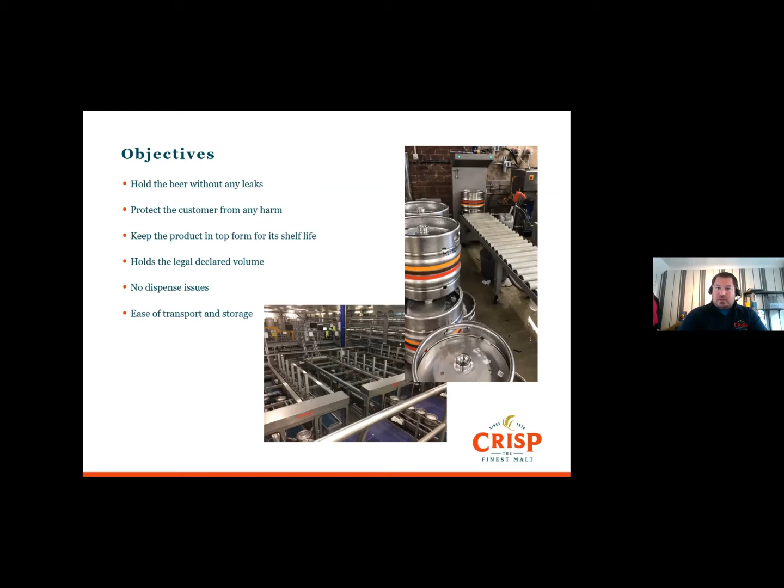Okay, so the first thing we need to think about when we come to packaging beer is the condition the beer's in, and we need to make sure that that's right for package, because it's going to have effects. So clarity-wise, the beer can be hazy or unhazy. It's up to how you want to present the beer to the customer, but if it's got yeast in it, you do want the yeast cells to be below 1 million cells per mil. Too many yeast cells is really not nice for the customer, and you might encourage some secondary fermentation in there as well, and that might become a bit of an issue.

We need to make sure the temperature is well regulated. Anything above 4 degrees C, you're not going to be able to get the CO2 in solution, and it's also going to fob quite a bit when you're filling, so you're going to struggle to get the right quantity of beer into pack.

If we are diluting any beer, which happens in some of the packaging plants, contract packers, or in the bigger brewers, you really want it to be done before pack, and you want it to go on a go/no-go. As you're diluting the beer, you are changing the whole structure of the beer, so it can have an effect on the PG and the palate, and the pH as well. So it needs to be well checked. And if you're using any water for dilution, you do need to make sure there's no chlorine in it, because you can get some chlorophenolic flavors coming through.

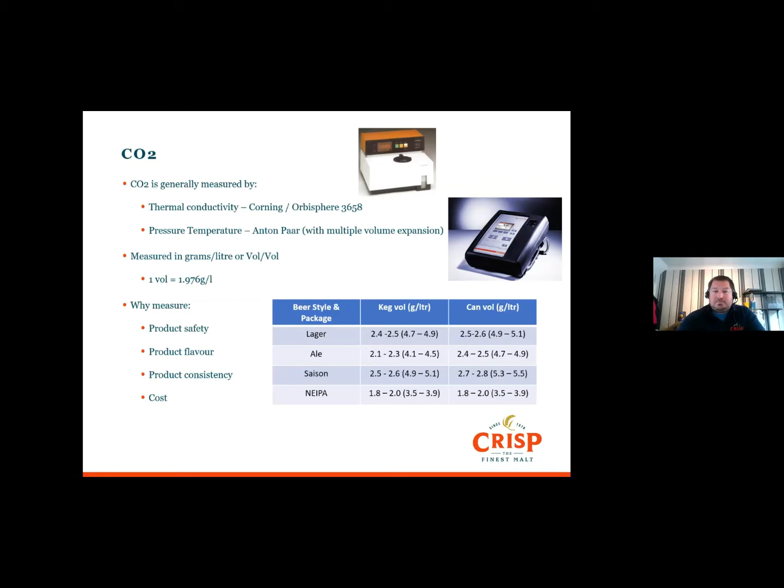DO2 measurement has come on a long way in the last few years. So the older fashioned way was using an electromechanical sensor where you've got a probe, and again the beer will flow over it and it will measure the oxygen within the liquid as it flows through it. And you've also got the optical sensors now as well, where it'll basically fire an LED light and depending on the oxygen levels within the beer, some of the light will be absorbed and will give you a reading of how much O2 is in the beer.

With them all, it's really important to keep them clean, because if you've got any biogrowth in there, it will use oxygen, it will skew the reading. The optical ones are a lot easier to keep clean and really keep them in use. The electromechanical ones need quite a bit of tender loving care to make sure that the membranes don't fail in any way and don't get bubbles below them. But the optical ones these days are very, very good.

When we are using them, we need to make sure that there is good flow control. So do take a look at the recommendations from the supplier to make sure that you're within the right control going through. If you just turn off the flow and don't let it go, you'll get an incorrect reading, generally low.

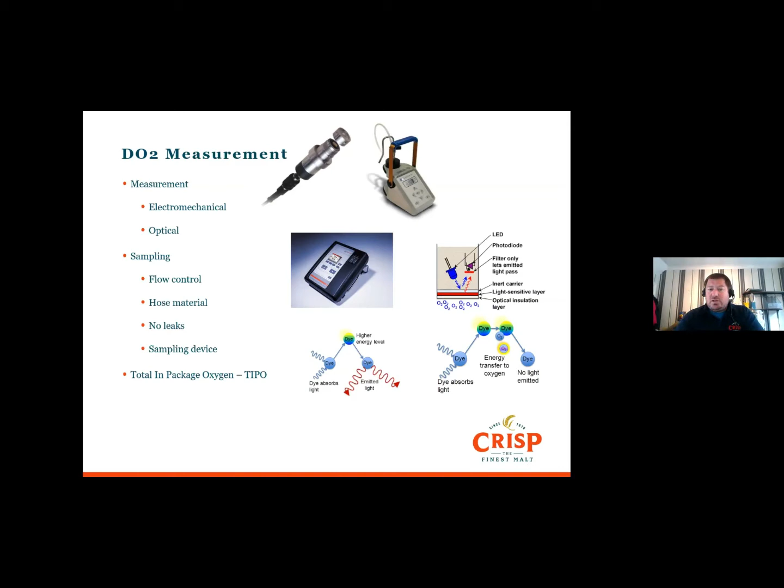So we really want to control DO2. Everybody knows what effect it has on beer. So there's quite a few ways we can do this. We can use deaerated water to flush out all the lines and the tanks, and then purge it with CO2. So if you fill it with deaerated liquor, it's fine to just then follow beer through. It'll take most of the oxygen out.

If you've not got deaerated liquor, then if you fill your lines with water and then blow it out with CO2 or nitrogen, that'll really bring the oxygen levels down. And the same with tanks as well. If you really want to make sure there's no oxygen in the tank, you fill them with water, put top pressure on, and then blow the water out, and they'll be fully deoxed.

Making sure the system's fully balanced, again, to stop pump cavitation. So you can do that by using a VSD, which is a variable speed drive. So it's really good when you fill a tank to start slow, start really, really slow until you build up enough volume within the tank where the liquid's going into the liquid, and then you can speed up and then slow it down again at the end once your feed tank's becoming empty, which is really easy to do with VSD.

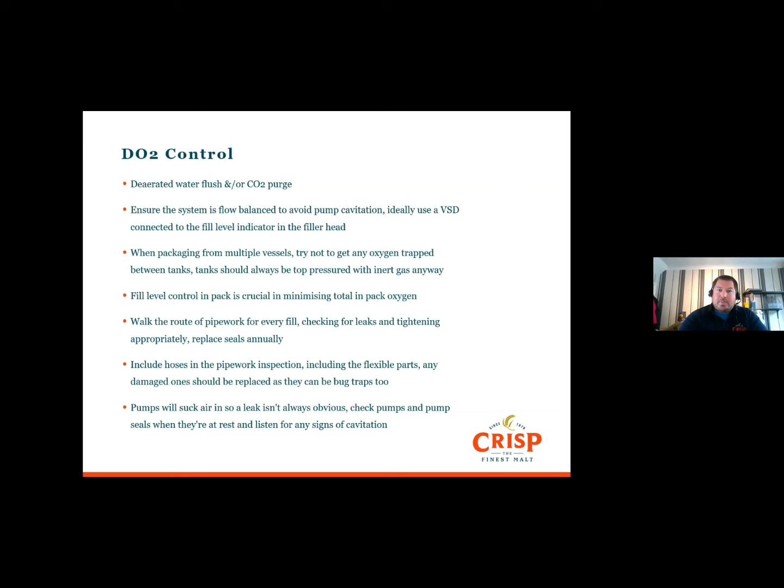So coming on to total package oxygen. So as said before, we've got the beer, and then we've got the headspace. So the total package oxygen is the combination of the oxygen within the beer and then the headspace. It's not basically shaking it up and then running it through the DO meter and then getting your results. That is the oxygen within the beer, and you need that, but we need to worry about a few bits and bobs as well. So we need to make sure that we've got equilibrium. So we're doing that by shaking the package. That makes sure that any of the oxygen within the headspace is evenly distributed between the beer and then the headspace when it settles out.

We need to know the dissolved oxygen then of that liquid, which we get when we measure it. We need to know the temperature as well, because the temperature has different effects on how much oxygen's within the liquid and the headspace.

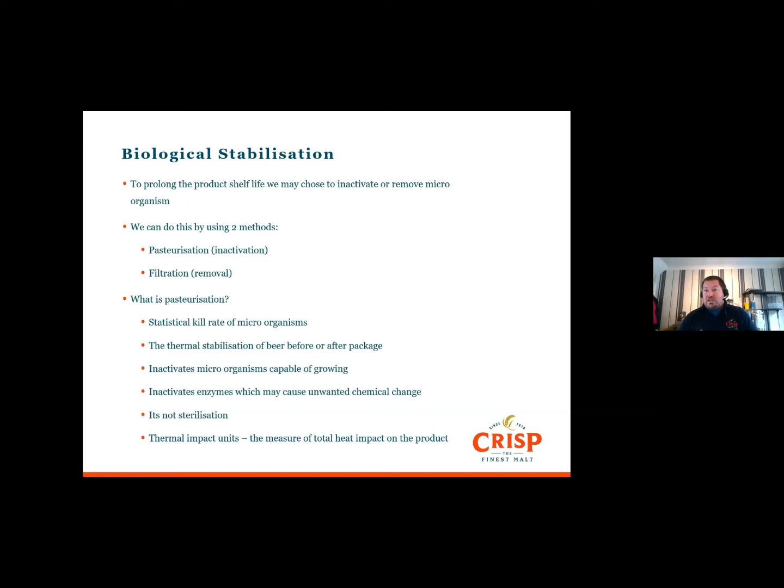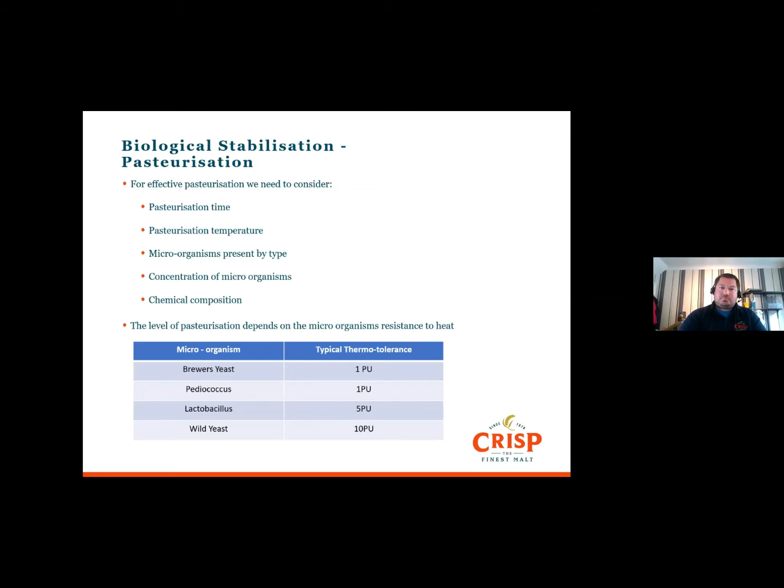So what is a pasteurization unit? It's basically one PU is beer that's been held for 1 minute at 60 degrees C, and it's Louis Pasteur who did the research work on this. So we've got a calculation that we can use for this, and it's basically PU equals the holding time in minutes times 1.393 to the power of the holding temperature minus 60. So we put all that together, we'll get the PU of what we need.

And typical PUs that you'll come across in the UK and Europe are between 20 and 30. And then USA, Japan is generally a bit lower at 5 to 15. And that's historically between the beers that were brewed in the different places. So in the US, Japan, you'll get quite light lagers. And then in the UK and Europe, you've got a bit of a different array of beers, giving it different UK bitters or different kinds of beers from Germany, some wheat beers.

So, have we missed one there? Nope.

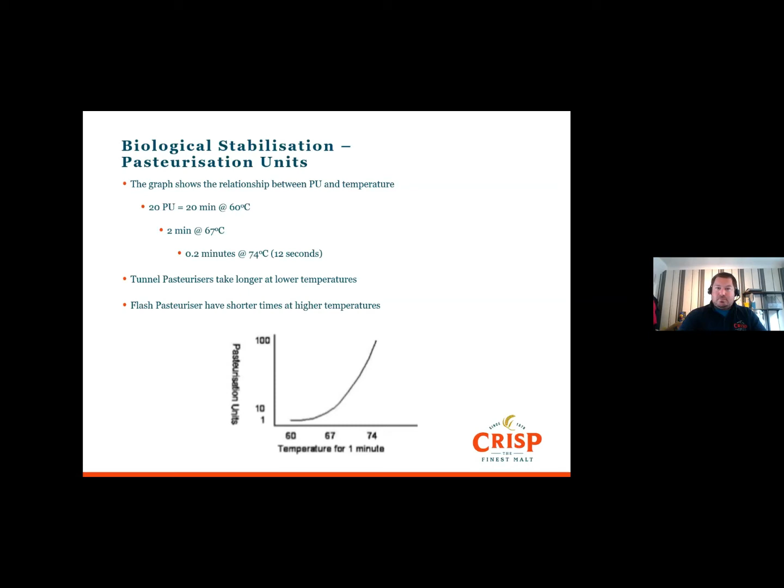With tunnel pasteurizers, as I said, the beer is pasteurized within the container, and they are actually quite simple bits of kit for as complex as they are. All that they are is a series of heated water tanks or cool water tanks that spray water over the beer as it passes through.

As the product moves through, so it enters the pasteurizer, it's either going to get picked up on a walking beam or just on a conveyor, and it basically gets water sprayed on it. But we can't just go straight away to pasteurizing temperature because we don't want to put too much shock onto the products, because we might damage the container. So we start off slowly, and then we gradually increase the temperature and then cool it down at the end.

A lot of pasteurizers these days as well have got PU control on them. So if they do sense that the PU within the package is going to go high for some reason, say that there's a stoppage at the labeler or the packer or anything, they'll basically put cold water on and they'll quench everything that's in there and stop the pasteurizing.

As well as that, we also use thermographs, and we'll put them through different parts of the pasteurizer as it's going through, just to double check. So Redpost will be a prime example, where it will basically measure the temperature as it's passing through the tunnel, and it'll give you a nice graph of exactly what's happening.

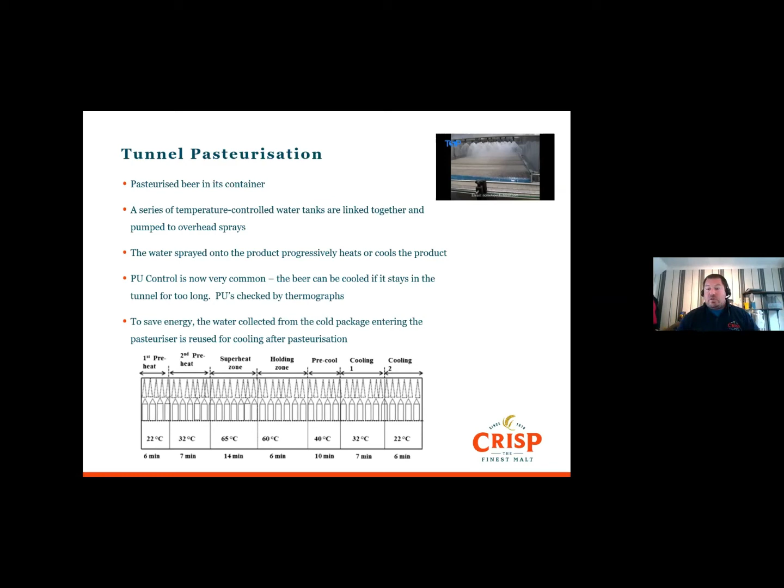So flash pasteurizers pasteurize just the beer; it doesn't do anything with the package, and it's all pre-filler, obviously. They're generally used in conjunction with a sterile buffer tank because you really need to make sure you've got good flow control on these, and they're a lot higher temperatures. So whereas the tunnel pasteurizer is going to be around 60 degrees, the flash pasteurizers are more up at 72 for that 12 seconds.

Now, because we're going higher in temperature, you'd think that we're going to have more of a thermal impact within the beer, but it's actually a lot less because it's a really short time where it's heated. So with a tunnel pasteurizer, it's going to be over 20 degrees for around about an hour, whereas with the flash pasteurizers, within a minute, it's up and back down again. So really, really good for the beer.

You do need to look after them though and make sure that they're managed right with a strict cleaning and sterilization regime, and they run at particularly high pressure because as we warm the beer up with the CO2 in it, the CO2 wants to break out of solution. So they typically run at around 8 or 9 bar. If that CO2 comes out of solution, then we're going to get little pockets of bubbles in there, and we're not going to get good heat transfer, and we're not going to pasteurize properly.

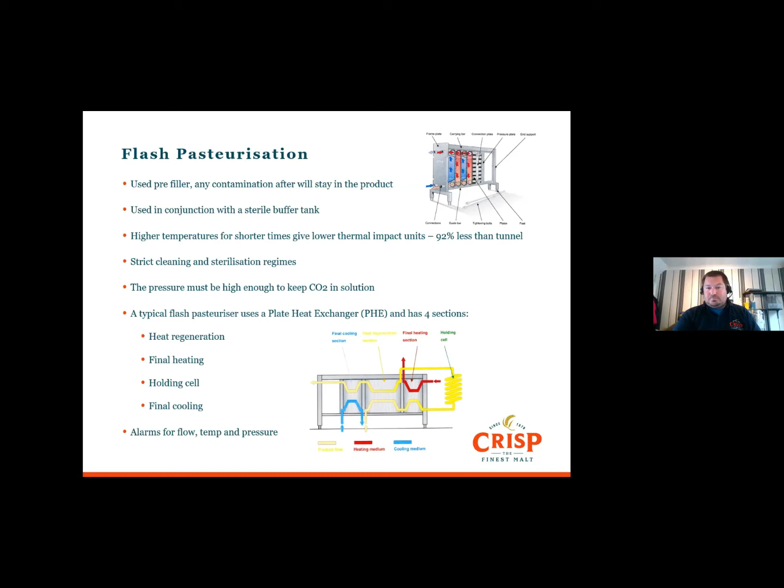The other way that we've got is by sterile filtration, which instead of leaving organisms within the beer and killing them by heat, strips them out. So we're basically filtering them out. So with these, you don't get any damage from any heat treatments. Again, it's before the package.

The difference between it being before and after packaging: if it's before, you've still got quite a lot that can go wrong when you're filling, up until you put the cap on, for any kind of contamination to take place. Whereas if you put it through a tunnel pasteurizer, it makes you sleep properly at night if you're a packaging manager, because you know that if anything's happened as it goes into the container, it's still pretty much going to be sorted.

So the sterile filters, the way that we look at how they work is basically the load reduction from what's going into the filter to what's coming out. And how much is being taken out is basically how we see how effective they are. So you can see it removes a very high percentage of organisms, but we can look at it from a slightly different way as well and go to the log reduction value. And we can see that if you're going for a filter, you want the log reduction value to be greater than 12.

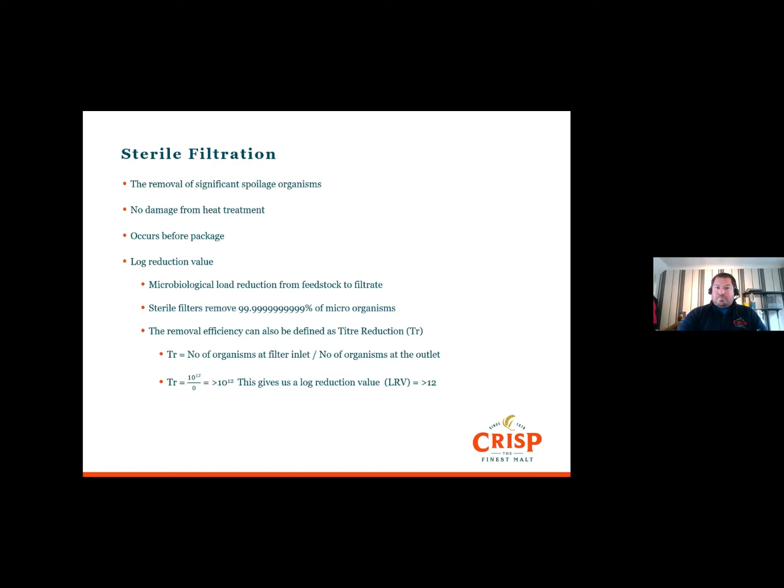There's also two different ways that filters are rated. So the difference is the description of what the filters are. Seems quite simple, really. So with the nominal, it's an arbitrary micron value assigned by the filter manufacturer. So there's a lot of ambiguity there, and it's not set in stone exactly what happens. With an absolute, it's the diameter of the largest hard spherical particle that will pass through under a specified test condition. So that's a lot more straight bat. Now, as a result of that,

thinking about what's at the start to what's at the end, if you've got an absolute filter next to a nominal filter in the same line with the same beer and same loading going through it, the nominal filter will probably only take out 85% of that initial loading instead of the 99.9999999%. So if you are going for sterile filtration, or mainly around beer filtration, do stick with the absolute ones. The nominals are fine for what I'd call your nuts and bolts filters, like any sand filters, or just to retain larger particles. But anything to do with filling and sterile filters, make sure you keep with the absolutes.

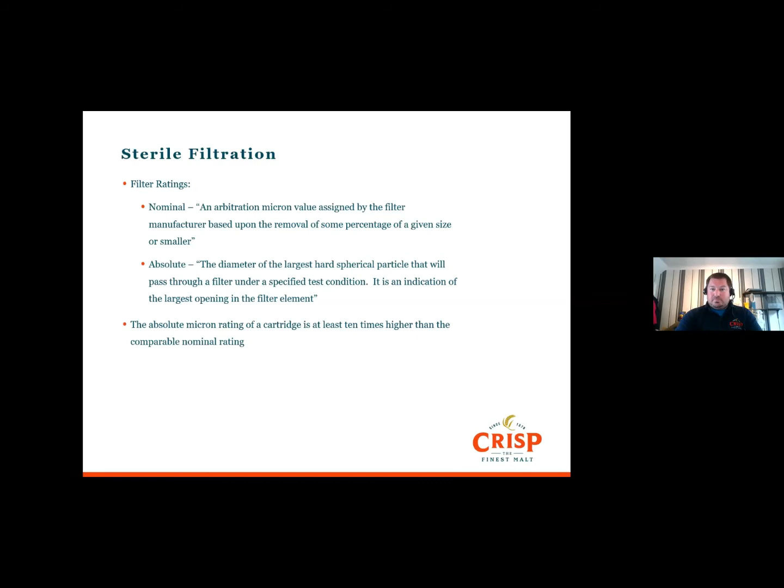So what some sterile filters might look like: the top one there is the Brewology unit. So the left-hand side is the sterile filter, the right-hand side is the pre-filter, and the screen just below it is how they were monitored. So it's quite a good little unit, this one. It had pressure sensors, pre-filters and after filters, and then it automatically kept an eye on the differential pressure going through the filters. On the sterile filter, as soon as you start getting up above 0.2 bar, that's when you really need to start thinking about stopping and cleaning, because if you continually do that, it'll just die very, very quickly.

So when we are using the filters, it's a really good idea to monitor and record that differential pressure and see how your filters are performing, because they are quite expensive. It'll help you come up with routines to make the best out of them. Also, when you're changing them, do record the batch numbers and record that you are changing them. It's just really good due diligence to show that you're in control of the process.

A bit more of a simple way of looking after them is down on the right-hand side. So the one up here was for a keg filler. The one down here is on a small pack line. So you can see we've got three. We've got a pre-filter, and then we've got the first 0.45 micron filter, and then we've got a second guard filter down here, just to make sure that if anything failed on this, the second one would make sure it's taken out.

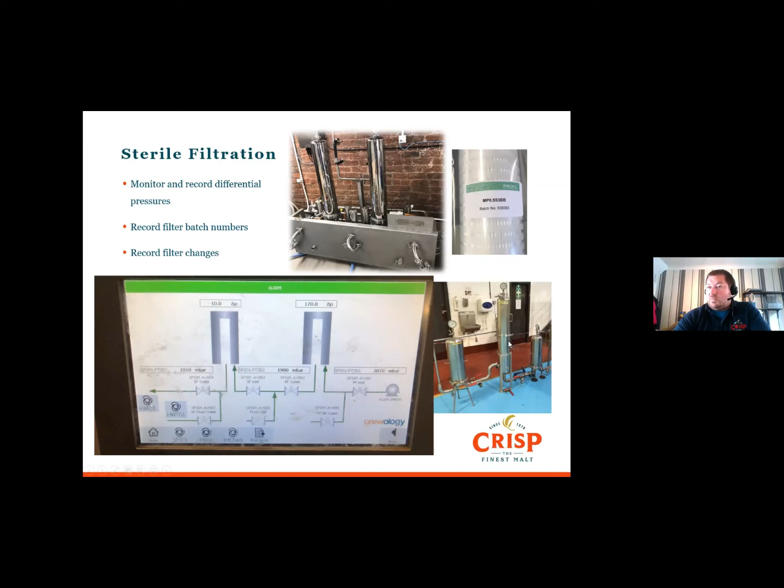So coming on to the keg, kegs come in generally three sizes. The most common now by far is 30 litre and 50 litre. 100 litre has kind of been phased out because of manual handling issues. And they're always available in stainless steel and aluminium. More and more these days it is stainless steel. You don't see many aluminium kegs knocking about anymore. They are pressure vessels, so they're generally tested up to 90 psi, and they've got a safe working pressure of 60.

They come with several different kinds of spears, so depending on how they're going to be dispensed and what dispensing head they've got, depends on what spear is within them. And what is unique around the stainless steel kegs is that we actually need to reuse it, so we need to make sure it's thoroughly clean.

So we've got a few different surfaces that we need to worry about when it comes to that. First of all is the outside of the keg. So we need to clean that up the best we can, get rid of all the old labels and just make it as attractive as it can be to the customer. Although they've probably been stored outside at the back of the pub for 4 weeks underneath a tree getting covered in all sorts, the landlord doesn't necessarily like getting a dirty keg back.

We've got the valve system on the spear. We obviously need to make sure that as that's broached, everything around it gets cleaned. We've got obviously the inside of the spear, but we've also got outside the spear. So you can start to see now where there might actually be some shadows around the keg cleaning, because we've suddenly got this long piece in the middle, and how we're going to make sure it's all thoroughly cleaned. And then we've obviously got the keg inner surface as well.

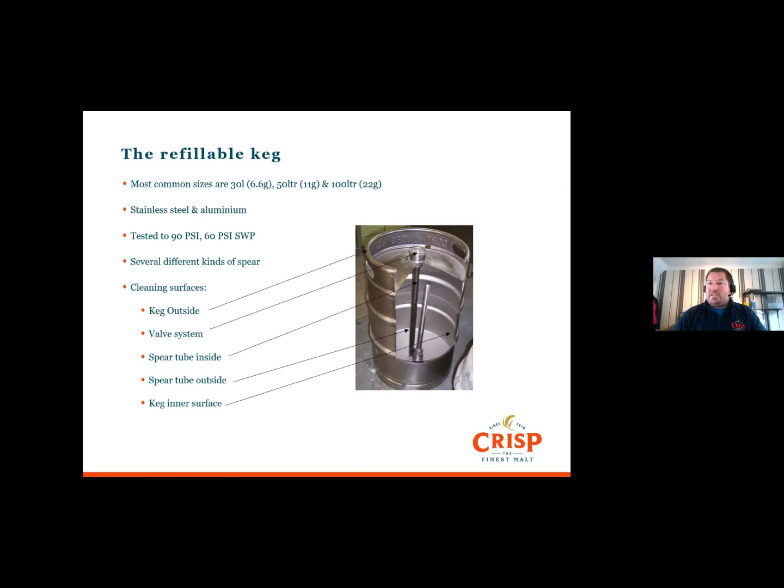So before I start using any kegs, the first thing that we're going to check is for damage. So just making sure that it's not dented in any way, the spear's not in a bad way. And we're also going to give it a smell to make sure that it's not got any hydrocarbons in there or paint that we're then going to fill beer into and completely destroy. And you might want to just check the spear's actually tightened up as well. Generally, we're cleaning them upside down, and we're going to supply the feed through the spear, and we're going to return it through the gas vents.

So the general stages through which we're going to clean the kegs: we start off with the ullage. So whatever beer's left within the keg, we need to get rid of that. So we can do that by just putting air on top of it and blowing it out. It's also a good thing to remember that that's duty paid beer. So if you can collect that and sample it and make sure it's right, then you can actually claim the duty back on that as well.

Then we're going to put a pre-rinse through it. We're basically just going to follow through with a pretty standard CIP now. We're going to put a pre-rinse through, but what we're going to do is pulse it. So we're not just going to put it on for a minute and forget about it. We're going to pulse it as it goes through. And then as we turn the supply off, the flow will actually then come down the spear and make sure that the whole of the keg's cleaned.

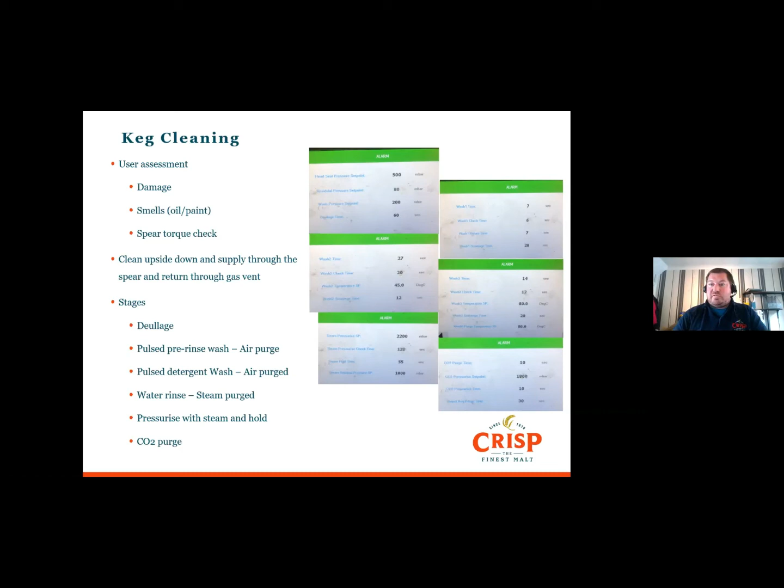The other kegs that we've got access to are one-trip kegs. So these get made up from quite a few different plastics these days, and come in some nice sizes as well now, 10, 20, and 30 litres. The main thing about these is the bags. The bags have got a dual layer aluminium lining. That aluminium lining just limits any oxygen pickup and CO2 loss.

And then we can see now, over a 6-month period, the maximum increase you're probably going to pick up on a 10 or a 20 litre keg is 0.3 ppm, or if you're 30, 0.2 ppm, and then you're going to lose 7% of your CO2 that's in there as well, which the manufacturers will say is comparable to what you'll get in a stainless steel keg.

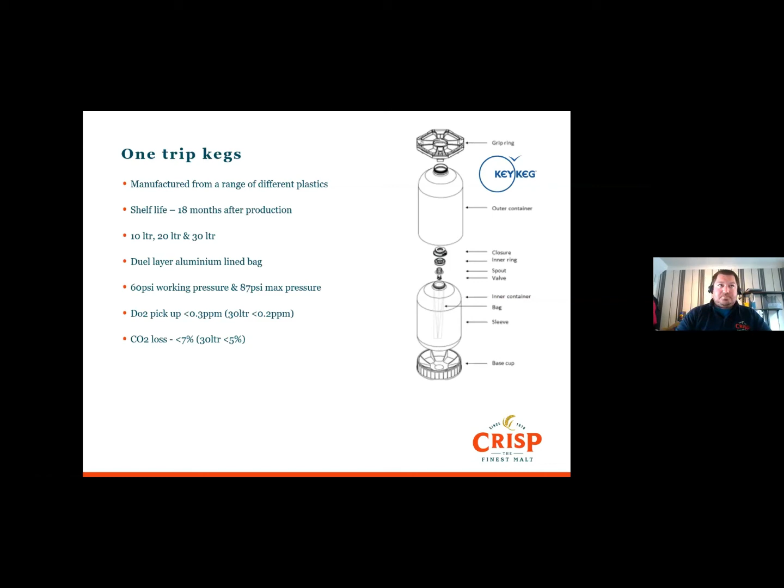So when it comes to filling the keg, we've got a couple of options. We've got the automatic option, or we've got a manual one. On the automatic one, basically we'll load the keg onto one of the fillers. It could be a rotary filler, it could be a linear filler, or it could be a line filler, or it could be a single head filler. They're filled upside down, like we say, and then they basically fill through the gas vents. So this just allows nice, slow, controlled fill.

Once we've got the gas to the beer to a certain level, we'll then speed up the flow by reducing the back pressure, and then come the end of it, we'll slow it down again, just to control the flow. And we know how much is going in there via a flow meter. Now doing this, we can actually fill around about 60 to 80 kegs per hour on a single head filler, like the one on the top right. The same head will also clean, but it'll only clean and fill at around about 18 kegs per hour. So it's the cleaning part of the keg process that takes a lot of time.

When you're filling it manually, KeyKegs are generally done upside down, and there's a special kit that you can get from KeyKeg. And then the stainless ones are filled on a slight angle. So if you've got a beer fob like what's on these ones, the flow will automatically stop once this beer fob detects that the beer's full. So the beer will basically lift up a ball that'll cover a hole and it won't fill anymore.

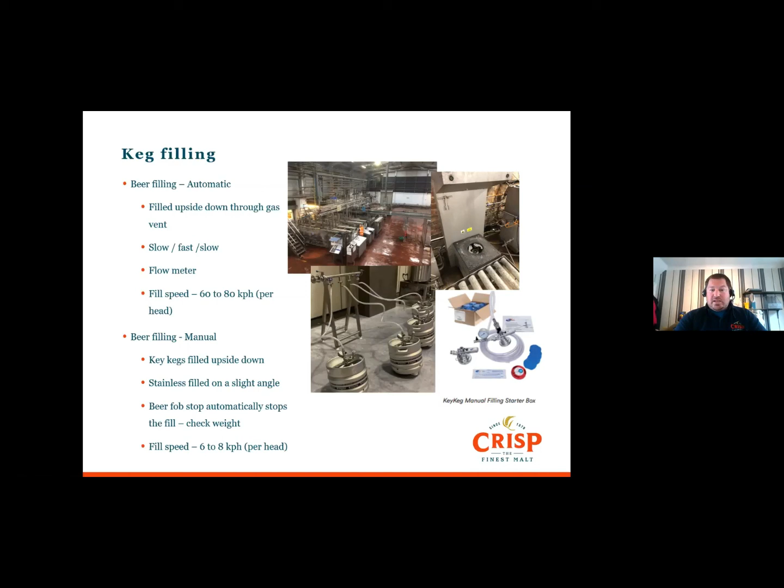So the reason why they're on a little bit of an angle is then when you put them on the floor, there's still headspace within there. If you just filled it without it being on an angle, it'd brim, you'd get hydraulic pressure and you get quite a lot of issues. And yeah, you're probably going to be able to fill between 6 and 8 kegs per hour per head on that.

So can filling: cans are quite flimsy and prone to damage. So again, before you come to use them, check them. The flange especially, because if you've got problems with the flange, then you might get issues with seaming. And just check the inside layer. They're a lot better these days. In years gone by you used to get all sorts of problems with it, but it's fine now. And record the batch numbers. And the same with the ends. There's a little bit of lacquering within the beer contact surface, but they're generally quite sturdy.

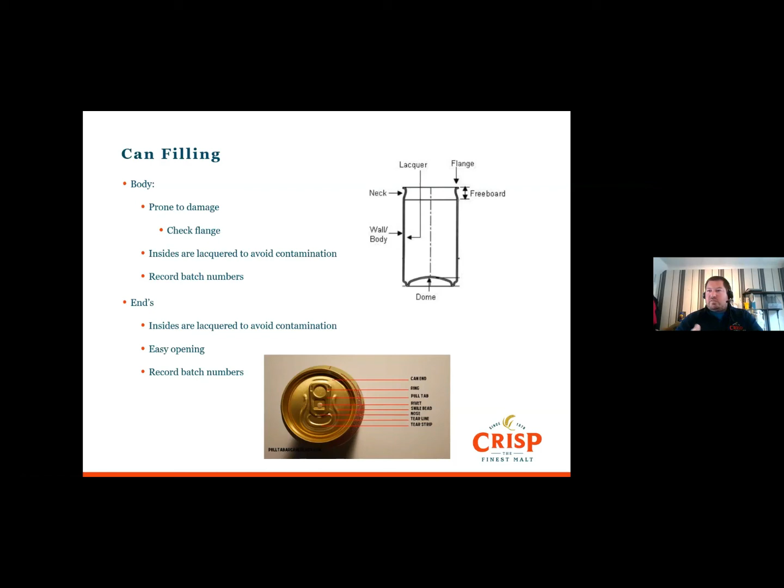So when it comes to filling cans, again, we can have a rotary or a linear filler. The rotary fillers are generally for the much larger operations now, so 12,000 to 135,000 containers per hour. Or we can go down to linear ones, which is generally between 4,000 and 6,000 containers per hour. As they come onto the line, they can either be depalletized on an automatic system, or they can come onto some kind of whale tail like what's in the photograph above, where we're just basically picking them up, putting them on, and then they'll slide to the conveyor.

More and more can lines these days are getting a can wash as well, so they might turn them upside down and then blow air or water through them just to make sure there's no contamination dropped into it. The cans have got quite wide lids, and it's quite easy to get something that you don't want in the can before you fill it. As they go onto the filler, they'll go through a CO2 or a nitrogen purge, and that'll basically make it 90% pure within the can.

It'll then move over into the filler, and you then just want to control the speed of the fill to make sure that it fobs just nicely. So you've got a nice little dome on the top, and you've got the right amount going in. You've got this nice little dome that just pushes out any of the oxygen within the headspace. And there's a few different ways that you can control the level on it. So some come with sensors that, when it gets to a certain level, it'll knock off. Some are timed, so the time depends on different settings per head. And then some of the more expensive ones actually come with a volumetric fill as well.

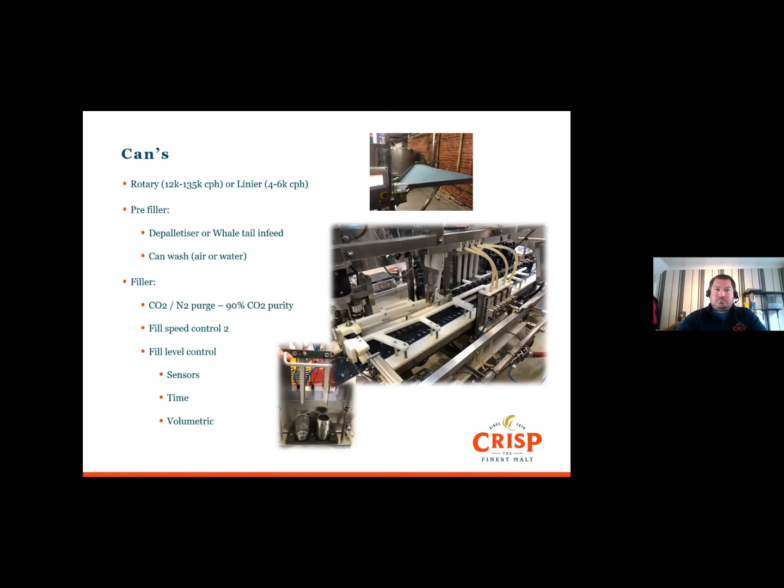Once they come out of the filler, they might go through a CO2 tunnel, which will basically put a little layer of CO2 within the can as the lid slides down onto it. The lid will hit the top of the beer foam and push it out, and the CO2 will brush the side and make sure there's no oxygen within there. You do see some now getting liquid nitrogen dropped into it, and then the lid's going to go on, and then it'll pass into the seamer.

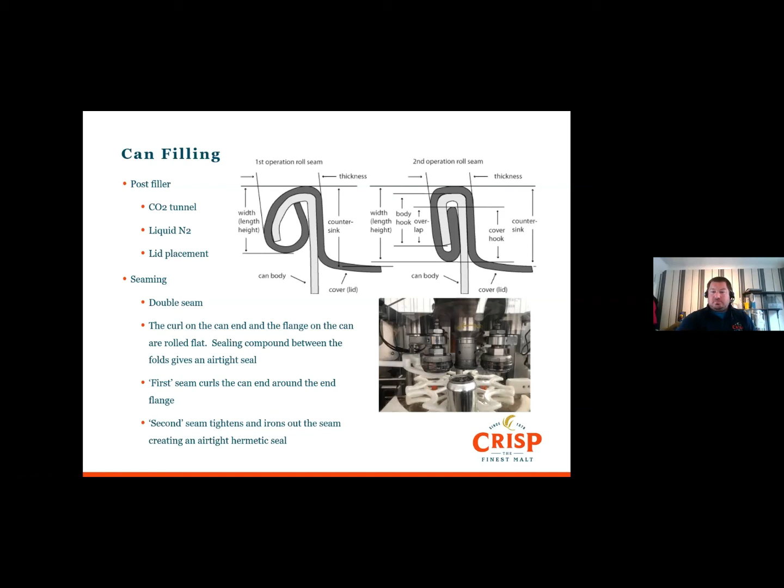So the seam's really, really important, and it's a double seam that we use. On the first seam, the end sits on top of the can, and then it basically curls the end onto the flange and rolls them flat. And then as it goes on to the second one, that basically just tightens everything up and irons it all out.

So there are a few different ways of seeing how the seams worked. We've got some non-destructive tests using X-rays or projectors, really expensive X-rays, projectors not that accurate as well. So the standard way of doing it is using tear down, where you basically go into the pack, tear down the actual seam and then measure all these different points and compare that to a standard. That's something your end manufacturer is going to be able to help you out with. As it comes out of the seamer, we're going to make sure we check the weight, and we're following the packers rules in the UK for that.

We're going to make sure that we give them a water rinse so there's no sticky beer left on there. Then air dry them and then put a date code on. It's also possible to put a date code on at the front, but the main thing is making sure it goes on when it's dry. And then from that, it's straight on into the packer.

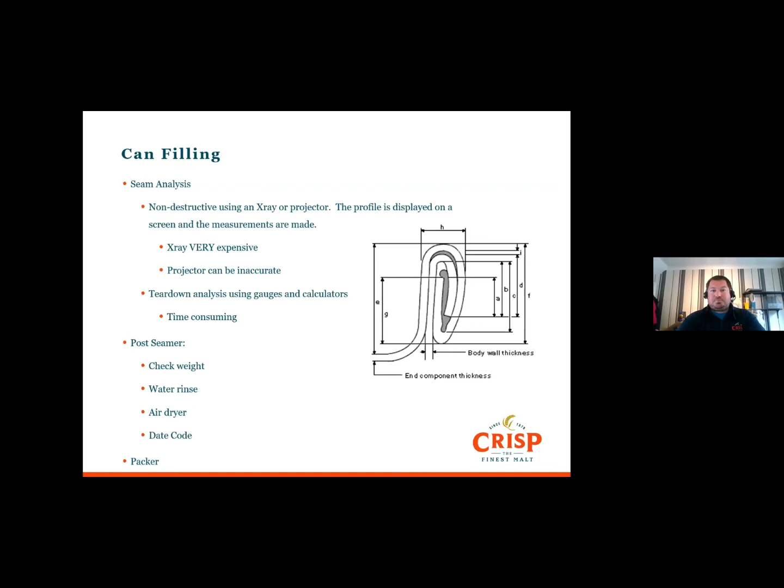Some things to think about while we are filling is if there's any hoses on there that are silicone. Silicone is permeable to oxygen, so oxygen can get in. Filler CIP is dead important because you've got different pipe diameters, and you're really looking for turbulent flow when you're cleaning pipes. So if you've got a pipe that's 1.5 inches down to your filler tubes that are 1/4 inch, something isn't going to get cleaned right. So you need to make sure that there's good chemical use within that, and also the timings. You might need soaking time on it rather than just relying on sending it round.

Oxygen control again. As the fill tubes go back down, they could actually introduce a little bit of oxygen within the can before they start filling. And it's also really good to keep short distances between the filler and the seamer. We've talked about the CO2 blanket, and again, dialing in the foam levels and fill levels to make sure you've got a really good dome formation for the foam and your fill levels.

And if you're going to think about buying an overseas one, especially for the UK, just bear in mind that they're a lot more expensive and a lot more complex than going out buying a tank or something. So do check the electricity supply is right, and check for the CE markings as well.

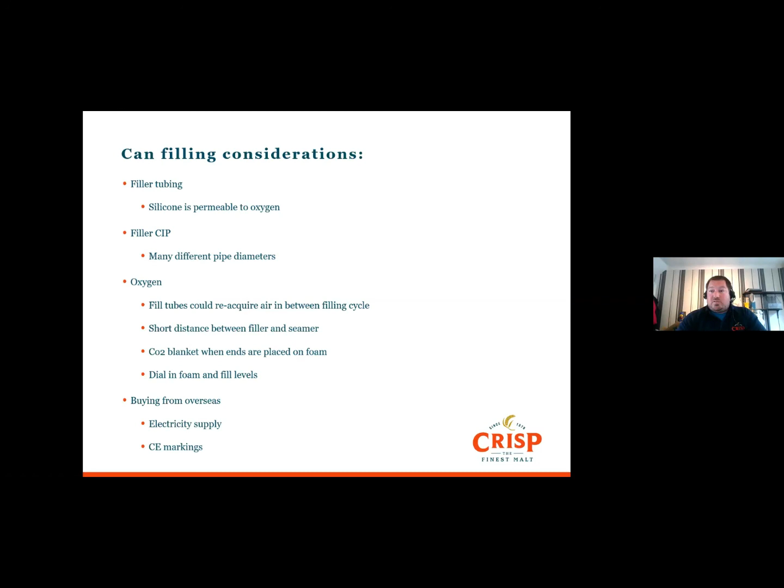At this point, later on in the cycle, we might start getting some foam issues. We know that using wheat and dextrin malt and high molecular malt, torrefied and malted products, are going to give us good head retention. But there's also quite a lot through the brewery that we can do. Things like keeping an eye on your brewing liquor, making sure you've got calcium levels there, your pH is spot on all the way through, and you're not pulling out too many tannins and lipids from your last runnings. Overuse of kettle finings. Over-foaming. Every time we move beer or foam beer from the kettle onwards, we reduce its ability to keep foam and make foam.

Yeast management, making sure the yeast doesn't get too stressed. We can improve heads with hop extracts using Tetrahop. Really does work on heads. PGA as well, really good for head retention. And then in the trade, making sure glasses are clean. CO2 is also something to really keep an eye on: the serving temperature, but the CO2 content within the beer as well. If you've not got enough CO2, the CO2 won't grab hold of all them nice proteins and form a head. So make sure them CO2 levels are controlled.

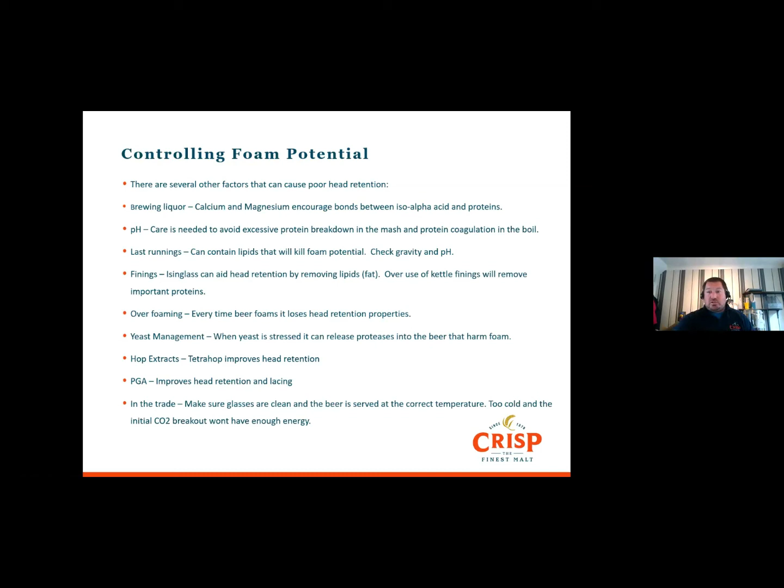And do think about the environment in which you're going to be packaging and storing. When you're packaging, you want it to be clean and tidy, and everything in order. You want to be able to get materials in and out nice and easily without tripping over everybody.

You don't want massive temperatures in there as well. If you're doing the canning in the brew house next to the hot liquor tank, then it's going to warm up all your beer and you might get filling problems. Moisture levels, again, moisture is probably going to promote lots of mold growth in different areas.

And think about as well where you are: no flaking paint on the roof, chemicals usage. You don't want anything next to the CIP where the fumes can affect the packages around it. And the same thing with the stores as well. Keep everything nice and tidy. Good temperature control. On high-speed lines especially, poor temperature control can just kill labelling and packing operations as you get different fluctuations in temperature and moisture.

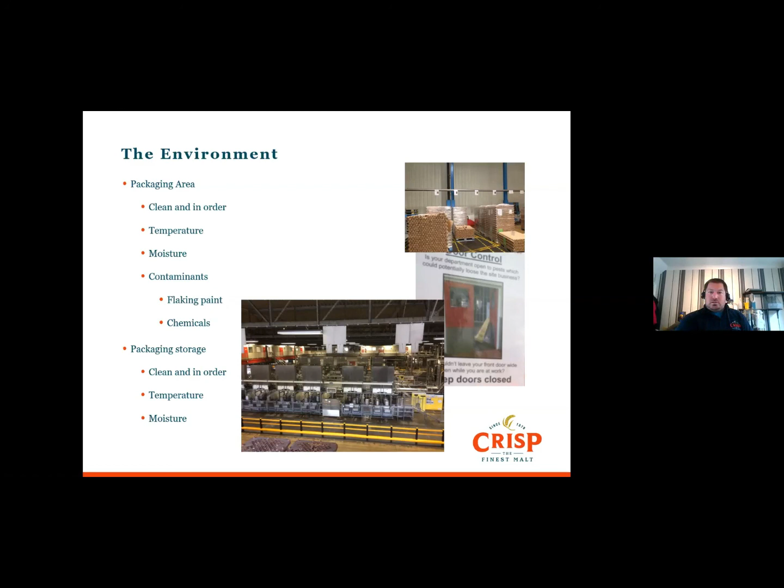So the first one is, is pasteurization a legal requirement? And what would be the pros and cons of not pasteurizing? So no, it's not a legal requirement. Your requirement is that you serve the best products that you can without harming anyone. So if you put a heavily yeasted product into, say, a glass container that can't withhold the pressure of a secondary fermentation, and then that pops, and you've allowed that to happen in the UK, then you're probably going to be in trouble for that.

So pros and cons of not pasteurizing. The pros are it does stabilize the shelf life. The cons are it can affect quality. So you do really need to keep an eye on the process as it's going through.

What are the best practices for cleaning and keeping sterile filters? Wowzers. So it's always best to speak to your filter supplier on this one. But in my experience, for cleaning, you can get specific chemicals that are perfect for filters that aren't quite as aggressive as caustic or acid. So always speak to your filter manufacturer and your chemical supplier, and they'll be able to give you a good idea of what's going on. But generally, it's a cold CIP or a warm CIP.